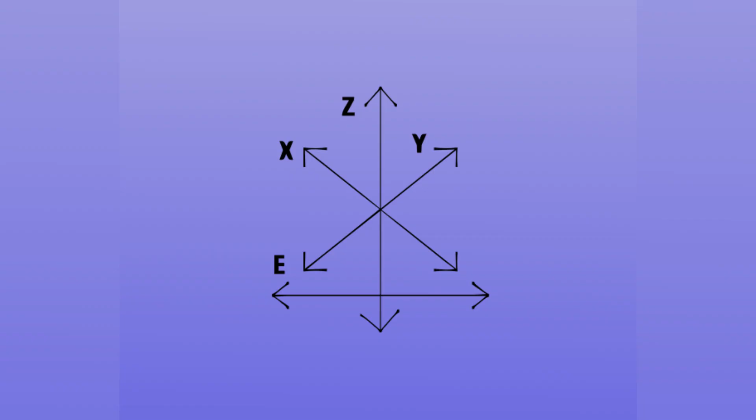Just a quick addition to the snowflake video. As you'll recall, we created the shape of a paper snowflake and then used a series of mirroring and fusion operations to virtually unfold it into the full design. I did it that way to emulate the process of making a paper snowflake, but as with many things in CAD, there is more than one way.

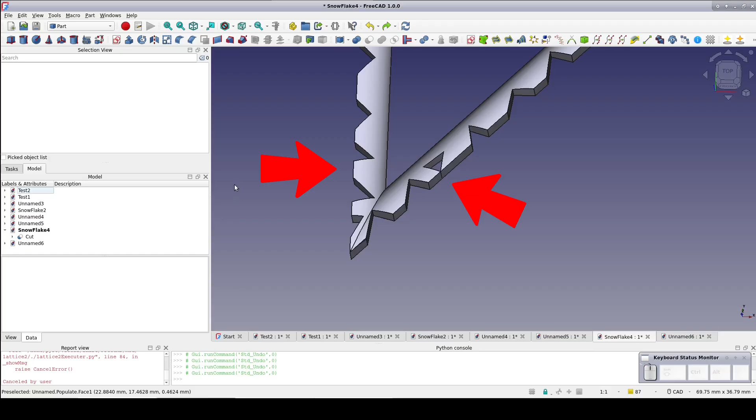I'll start back at the 1/8 of a snowflake. For the first step of unfolding, we're really obligated to use mirroring from the Part workbench. The reason for that is that we have an asymmetric design. The two edges do not match up. Just like before, I'll select the cut and mirror and one plane on the cut and click OK. Again, open the mirror and select it and the cut inside and fuse.

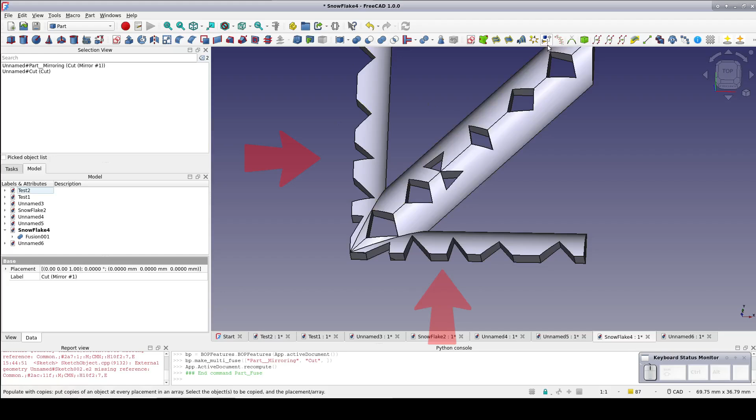Now we have a symmetrical tile. The vertical and horizontal are identical. So now I'm going to create a polar array from the Lattice 2 workbench. Select the array, change the count to 4 and the radius to 0. Now select the snowflake tile, the array, and populate array with copies, and there's our snowflake.

After all of this, I had just one more problem. The intricate cutouts in the snowflake did not want to stick to the bed. When I 3D printed, the corners of the diamond-shaped cutouts kept lifting off of the bed and trying to form a glob on the nozzle. In such a case, an extreme measure would be to configure the slicer to create a raft. But in my experience, it's often hard to separate a print from its raft, especially if the print itself is in any way intricate as the snowflake is.

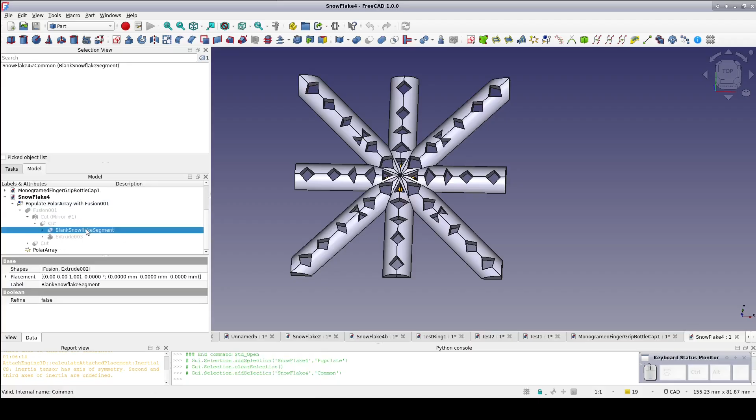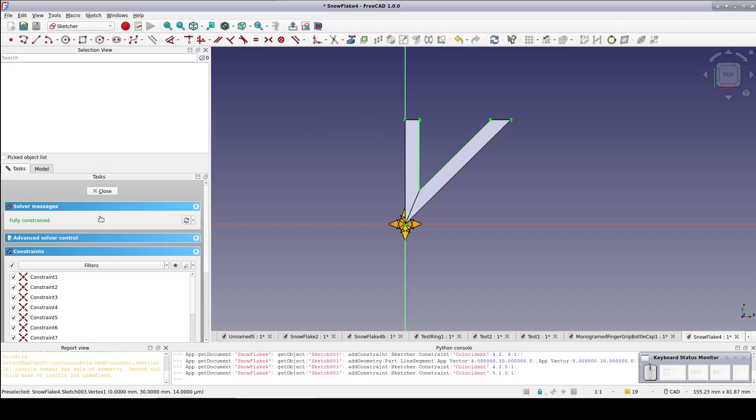So I decided to build a raft into the design and put it just under the snowflake itself. Hide the snowflake itself and unhide the blank snowflake, which is just the shape of our folded paper. As you can see, I did finally go back and rename all of the objects in the model to find things easily. Create a sketch on the XY plane and bring in the edges of the 1/8 of the snowflake as external geometry. Using the polyline tool, trace around the shape. Close the sketch. Select the new sketch and extrude it to 0.2 millimeters, which is the layer thickness that I'm printing in.

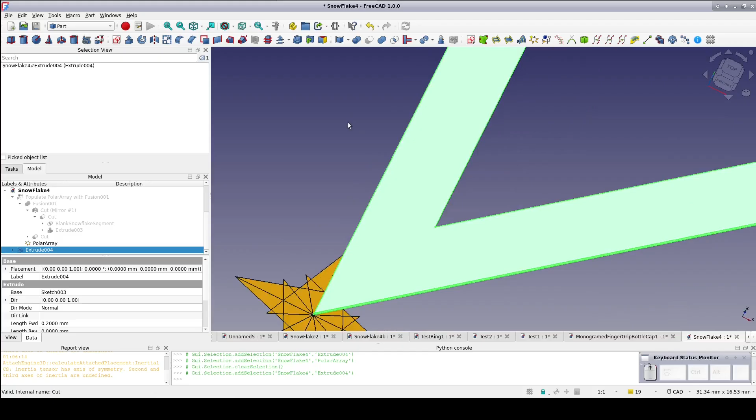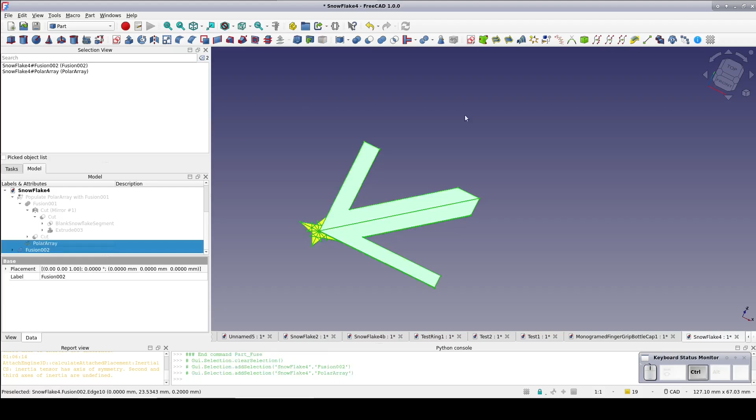Now, like the snowflake itself, we must mirror the raft. So select the extrusion and mirror, and select the plane to mirror along. It's a pretty thin extrusion, so I'm having to zoom way in order to get it to select that plane, but it will select. Click OK. Like with the snowflake itself, open up the mirror, select the mirror and the extrusion, and fuse. We already have a polar array, so select the fusion and the polar array and populate with copies.

This is our raft. We have a choice. We can either select the snowflake and the raft and fuse, or simply select both of them together to export as a STEP file for the slicer. The result will be the same either way.

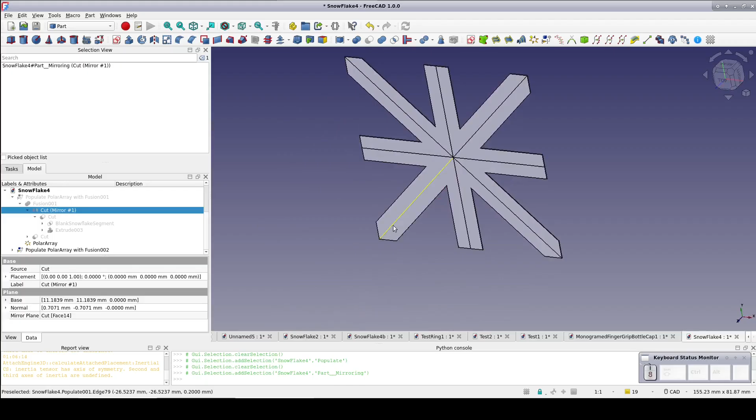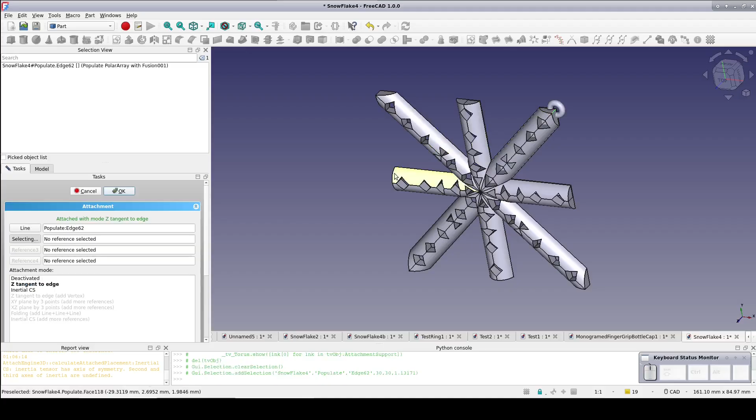Finally, I'd like to add a ring to the snowflake so it can be hung on a tree. So create a primitive torus, 2 millimeters as the major radius and 1 millimeter as the minor radius. Select the torus in the model tree, and in the data pane bring up the mapping dialog. Select the line defining the point at the end of one of the diagonal arms. Perfect just as it is.

Close the dialog. You'll note that the torus protrudes below the bottom of the snowflake, but that's okay. When it's loaded into the slicer, the bottom of the torus will be below the plane of the print bed, and so it will simply be left off. The only side effect is that PrusaSlicer will say the object is sinking. That's just fine. Now, once it's printed, it can either be left as is, which produces a pretty nice effect itself, or you could use a belt sander with a really fine grit paper and just sand off the raft. If you do that, please be sure to wear gloves.